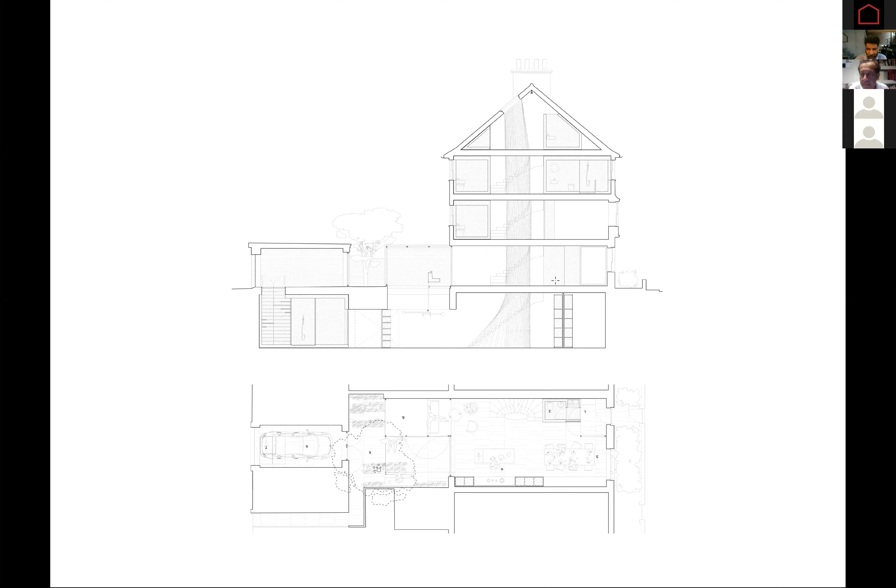So it's a house really that's mostly about internal modification, lots of cabinetry and some stonework. The stonework started as a reintroduction of some of the fine stone found in that house, namely travertine, and what we could do with that.

As you can see here, it's partly internal, partly external paving and floor finish, bringing that variety of finish internally.

Creating a staircase that would rise through the new basement and new roof extension, working with both stonemason and engineer, who reintroduced the idea of these reciprocal, part-cantilevered, part-reciprocal staircases.

Essentially, it's a medieval staircase technology that modern engineers and architects had lost, but was reintroduced more recently, specifically by Price and Myers in the late 80s.

So most of the house is a reintroduction of cabinetry. Some of this is by the same masons, who are obviously skilled. A lot of stonemasons are skilled in cabinetry or timber work as well as stone, because often the formwork for that stone would have to be done in timber.

Typical interior finishes, and there's our staircase. Now, the key thing here is that, apart from using some of that medieval technology, what we quickly realized as masons is that these staircases tend to have about 40% wastage.

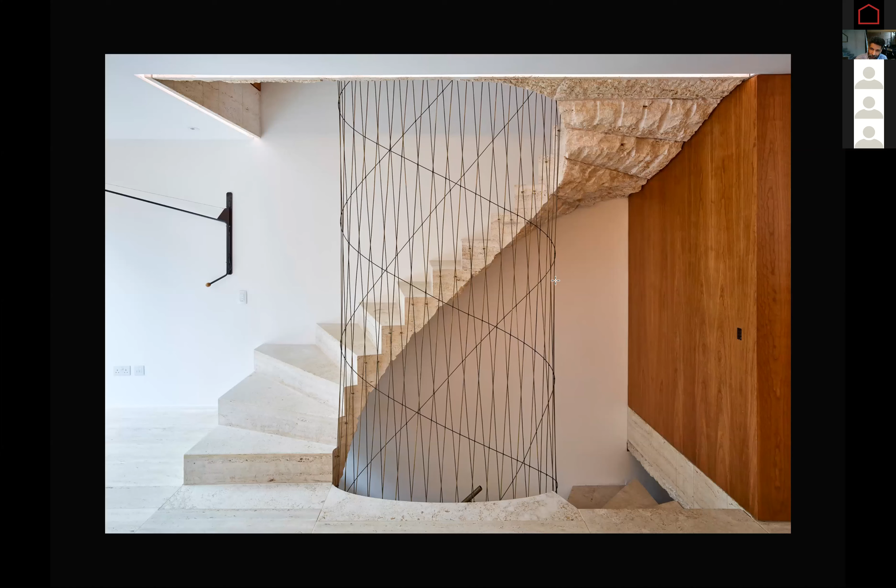So what we worked out with that mason was to take a block and cut or split the underside at a curve, not a straight line but a double curve. That would then unfold that block and allow you to get two treads instead of one out of the same block, saving material.

Looking at how we split that block, we realized, why not retain the finish of that? Given that we're thematically coming out of the basement, the subterranean area, and working our way up, refining the underside as we go, why don't we just leave that rough quarry, crude stonemason's finish as the finish, to emphasize that theme?

It's a view looking down at the new subterranean basement area of the house. This shows how we split those blocks and how they might fit together in the yard before they were assembled on site, and here's our stonemason assembling that from the basement upwards.

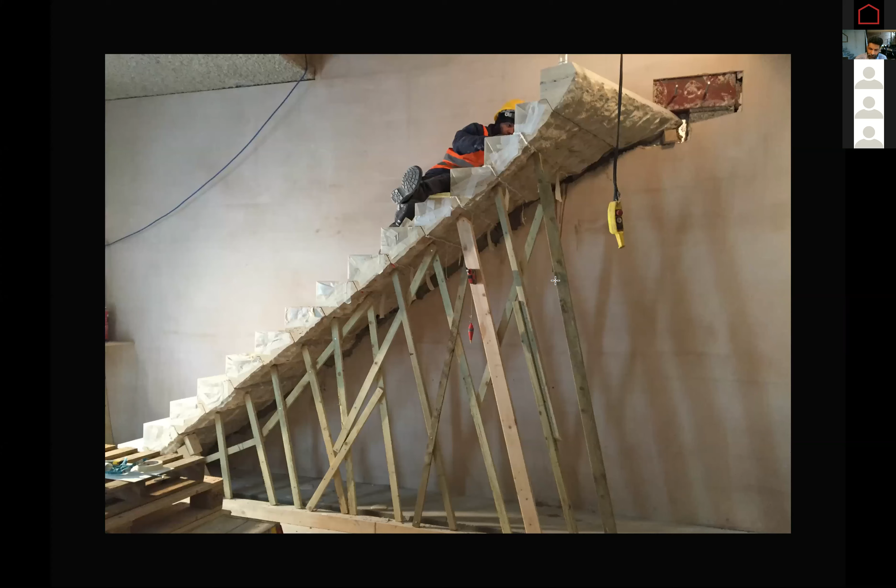One of the things we saw while in the mason's yard investigating how we might put this together is this very large limestone block, a subdivision of the master block that's been done with drill splitting.

Looking into the stone staircase introduced us to something most of us aren't educated in, which is stereotomy, the pattern-making of cutting stone and other materials. That was effectively the method for medieval stonemasons all the way to, I guess, the late 19th century, before concrete and steel became prevalent.

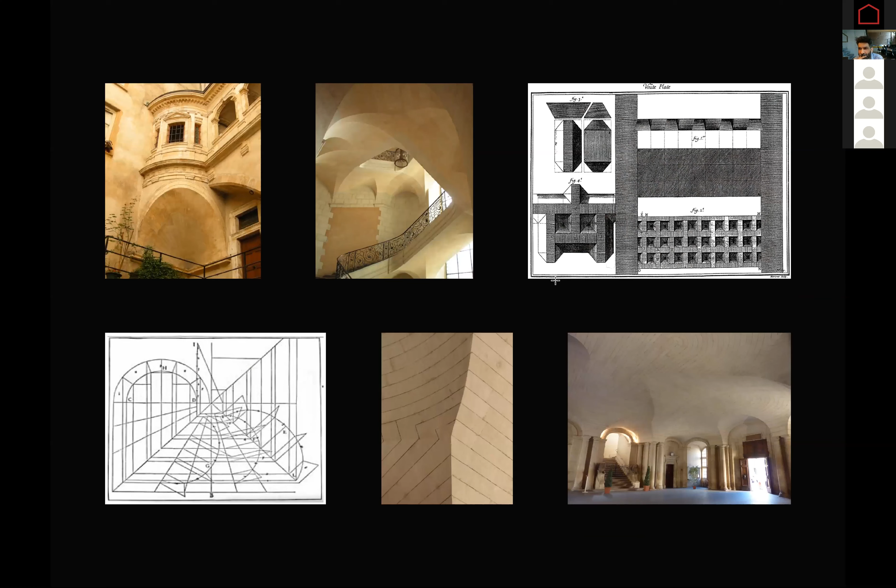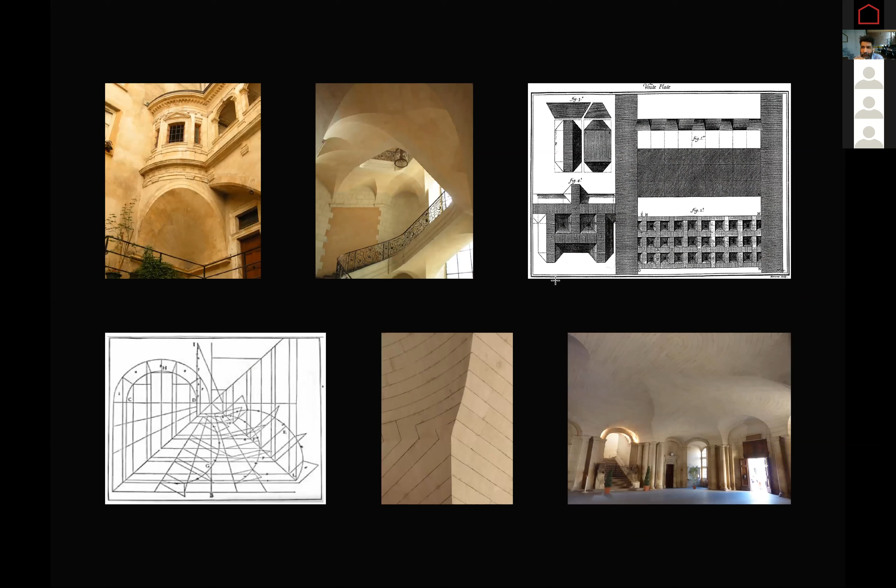This is an example of a staircase in Graz, a double interlocking spiral, helical stair. But what we found fascinating was, some of you might know Abeille, a 17th century French engineer—that top right-hand image is a drawing of his, suggesting that if you can't span a space in a single piece of stone, you could cut out smaller pieces and make them reciprocally rest on one another and span in a flat arch.

An example of that is directly below, where it's not interlocking in that grid manner, but it's still interlocking to effectively give you a flat stone soffit that then takes the loading down in those sort of scalloped arches. And I guess some other examples there, earlier ones of squinches and other forms of geometry that then take that load down. This is all very fascinating to us.

We weren't sure how relevant it could be. It's very easy to obviously introduce that into, what can I say, high-end luxury dwellings. Is it applicable anywhere else is the question.

Naturally, in the introduction, we were talking about how stone tends to be used today, which is this method, effectively stone cladding. So you can see there in the drawing on the right-hand side, your superstructure might be concrete, it might be steel framed. You would then clamp into that. You'd have to clamp through insulation, vapor barriers, waterproofing, and all the rest of it, until you get to then a set of rails onto which the stone is fixed, and the stone itself would be somehow bonded to another set of rails or other system. Quite a lot of energy, effort and cost in doing that.

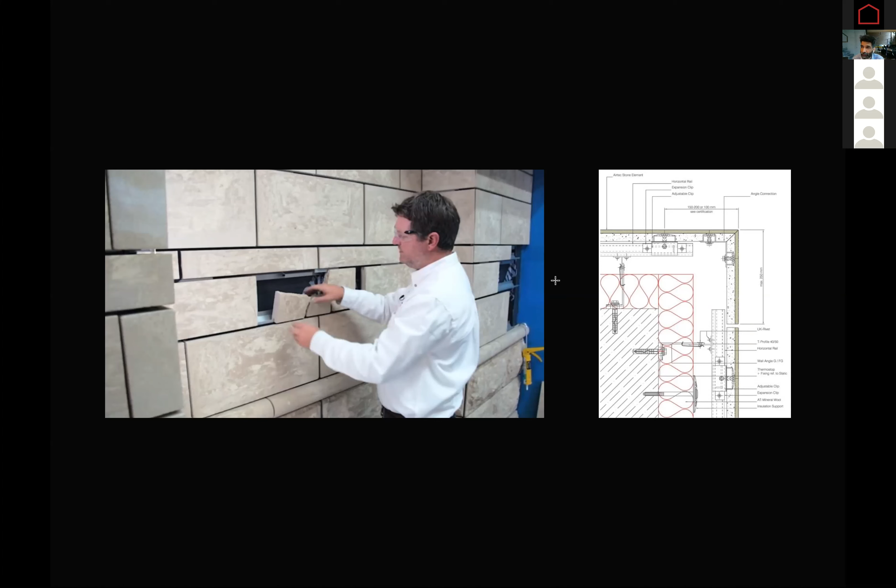So this is the result really from that system over the last 100 years. For us, the question then of whether you can build in stone as superstructure, and economically compared to, say, the luxury of that staircase, investigating it for a well-off client, as it were, arrived with Clerkenwell Close.

Now, Clerkenwell Close sits outside what was the old medieval city of London, on a site which was a Norman nunnery. So there was nothing on the site until the Norman invasion, and the Normans built this Augustinian nunnery. And they introduced the idea of using stone, cut stone, limestone, that's fresh out the quarry, so relatively soft to carve, and interlocking the stones.

So after 6 months, a year, they calcify and become incredibly strong, compared to, say, rubble wall construction, so rubble walled fortifications. Now, obviously, once they gain power and stability in any area, that same method, technology is used for other buildings of status, specifically here religious ones.

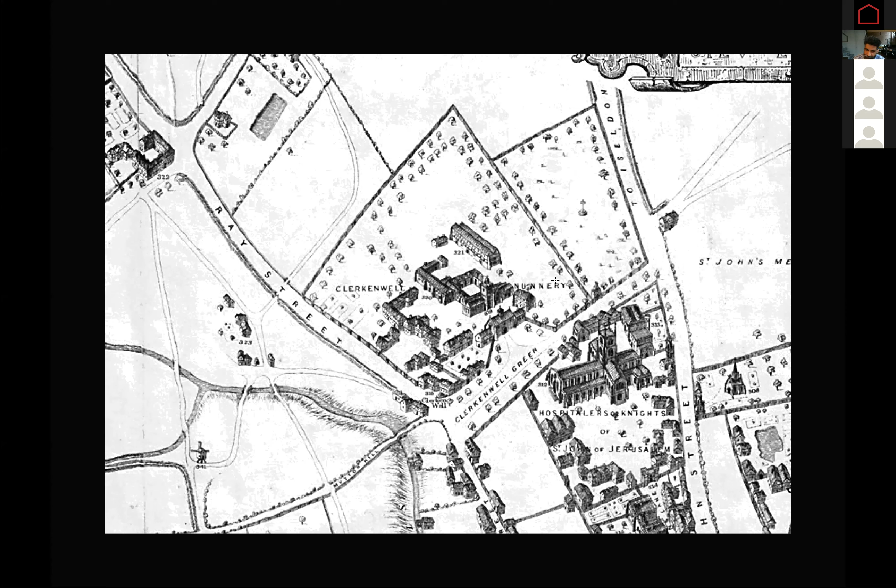And today, any Labour Party marches normally start on the 1st of May from that site. So it's an area that's, because it's been outside the city walls, was slightly freer in terms of its laws for radicalism, printing presses, revolutionary ideas, if you like, all the way until after the war, when certain boroughs of London, including this one, lost about 50% of their population, and things became a little bit more conservative in outlook.

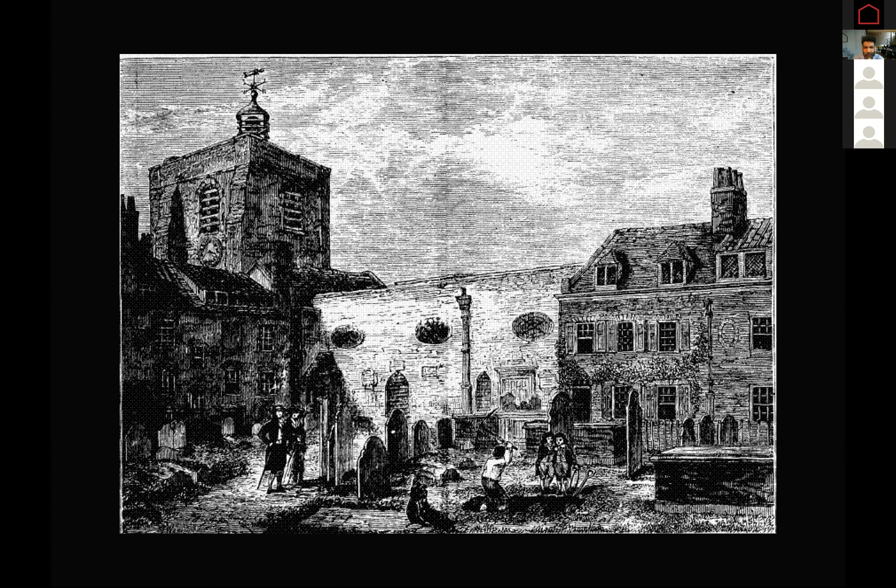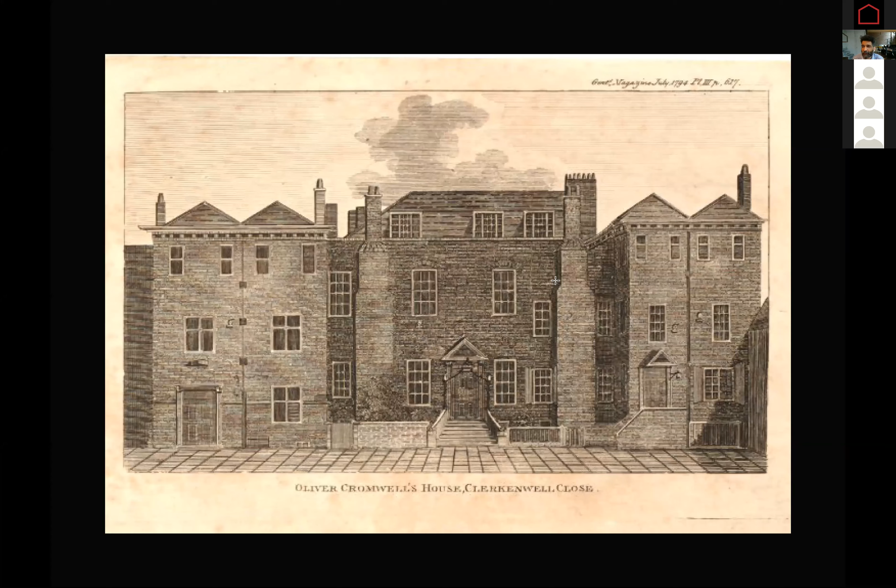This is what was left before the Victorians demolished. This is Oliver Cromwell's house before it was demolished on the close, effectively our neighbour on the site. And then the typical buildings that were on the site, if they weren't the abbey proper. So if it wasn't the nuns' accommodation, but the servants to the nuns and the stables, it would have been this sort of structure, timber structure.

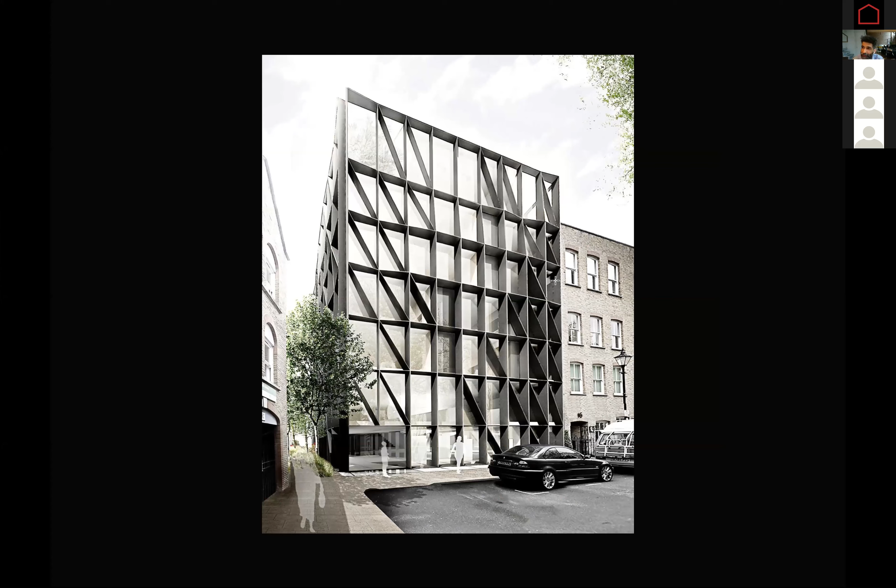Our initial designer response, as well as taking on board various environmental criteria and all the other aspects that all of us typically as architects use, was to suggest using an engineer's piece of software, a self-learning algorithm. For glazing on an office or residential building, typically those glazing units come with some sort of aluminium or mild steel substructure that's bonded, clipped or fixed, like a curtain wall, to the floor slab, with the superstructure behind.

It occurred to us, so supposing you take that typical unit system and strip it of all its metal, leaving just a double glazed unit. Then you take that metal, as if you've melted it down, and give it to the algorithm and say: we have this unit system of glazing, and we want to reapply that metal, or less of it, as superstructure.

The algorithm effectively gave us a grid of metal that we put fireproofing on, and then a hot bronze applied finish as a self-weathering system. It gave us a grid with some diagonals, because the load path on the building had to stop it twisting, and generated areas that require less metal and some that require more—quite an interesting modulation, in some respects alluding to the idea of those medieval timber structures.

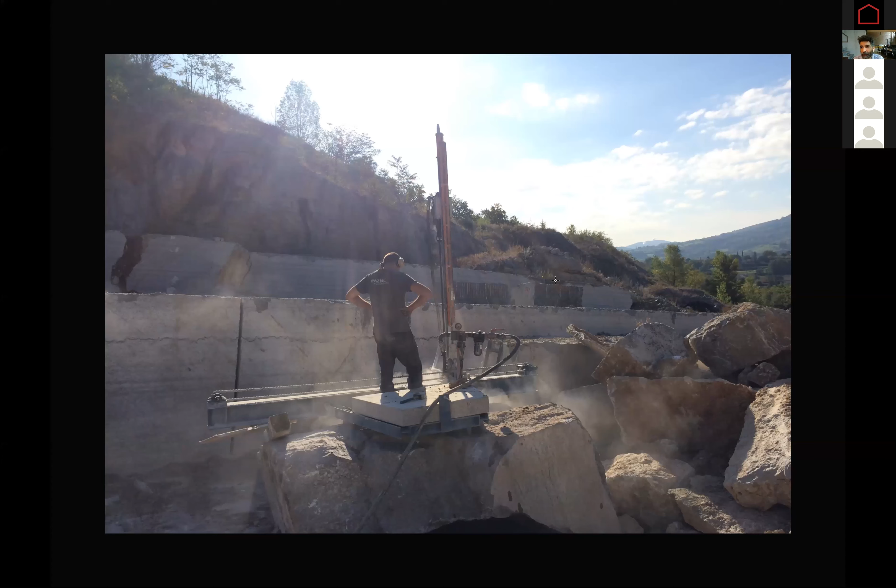Once we calculated the volume of stone together, we gave that to the stonemasons, and they said, look, we can supply and install the stone for this much money. That, as it turned out, was about 25% of the cost of building a steel frame or a concrete frame and then cladding it. Now you have to remember, cladding an engaged facade means insulating and waterproofing it, fireproofing it, and all the rest of it.

So the stone itself is superstructure, but effectively does all that at the same time. That's sometimes difficult for quantity surveyors to understand, because they still look at it as if it's only the frame itself, and surely after that cladding still has to be applied. It takes some time to run through an entire cost plan with a quantity surveyor and demonstrate that the cost of the stone is superstructure plus cladding plus waterproofing, weatherproofing, insulation—all the rest of it—because that's what it's doing. It's performing all those functions.

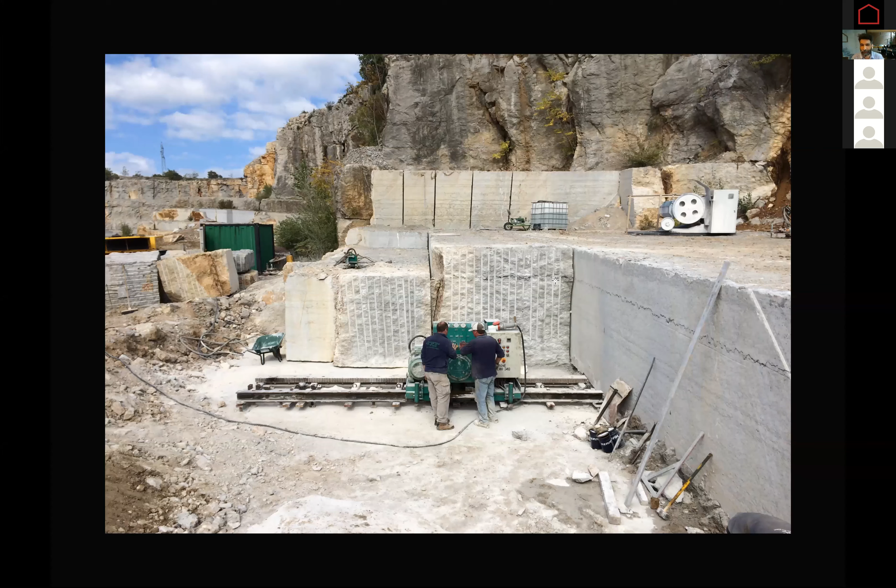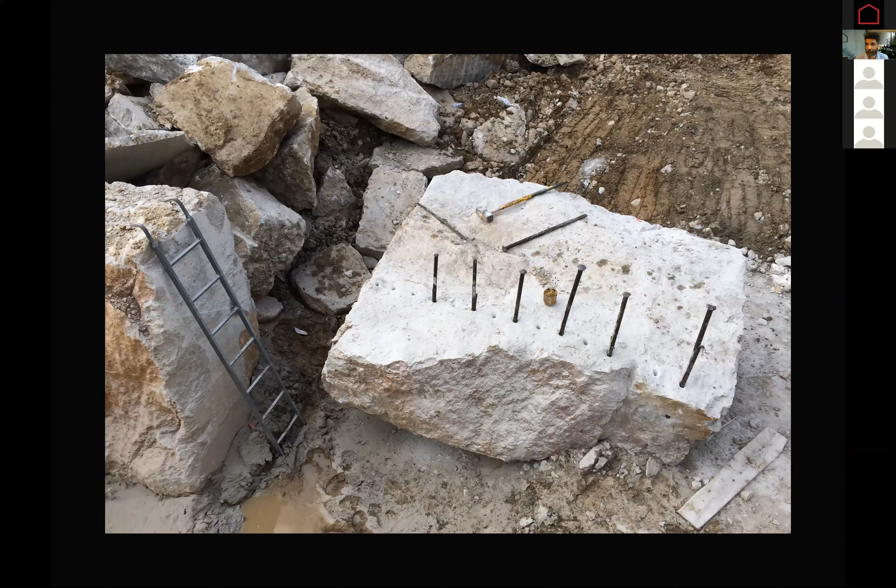Part of the reason it's inexpensive, especially today, is because if you look carefully at the cutting method, it doesn't take a great deal of labor anymore to cut the stone and extract it from a quarry. What we discovered is there were 3 types of finishes that come out of the quarry, and even today they're reducing. From right to left: the saw cutting that extracts the master block, the middle sedimentary layer split open with a bit of pressure, and the one on the far left is the drilling. Occasionally you'll find fossils, ammonite shells, and a quartz pocket every now and then too.

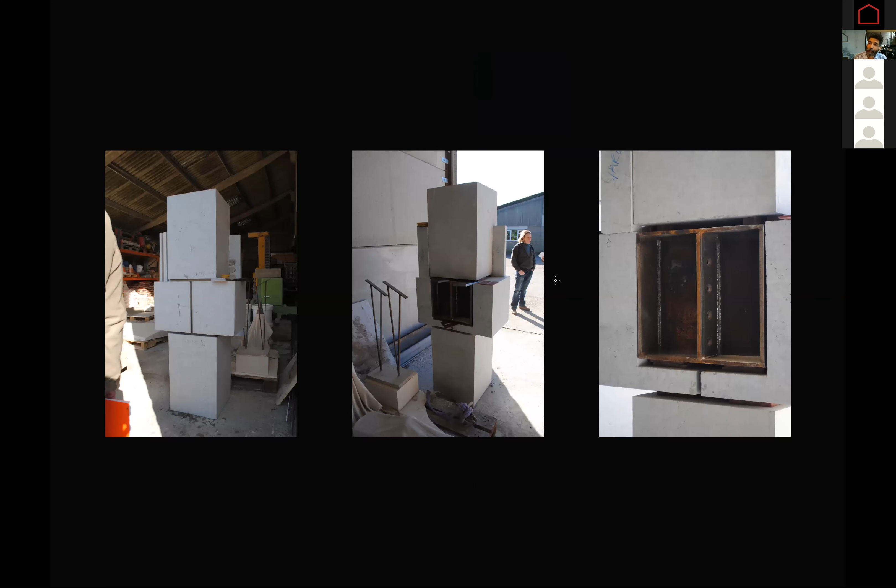The next step was to bring those stones together and figure out how to hold up the slab. We tested this in the yard with a metal box that's just grouted. Gravity essentially sits on top of the metal box, which is connected back to the floor slab. Our test said it was all going to work out fine.

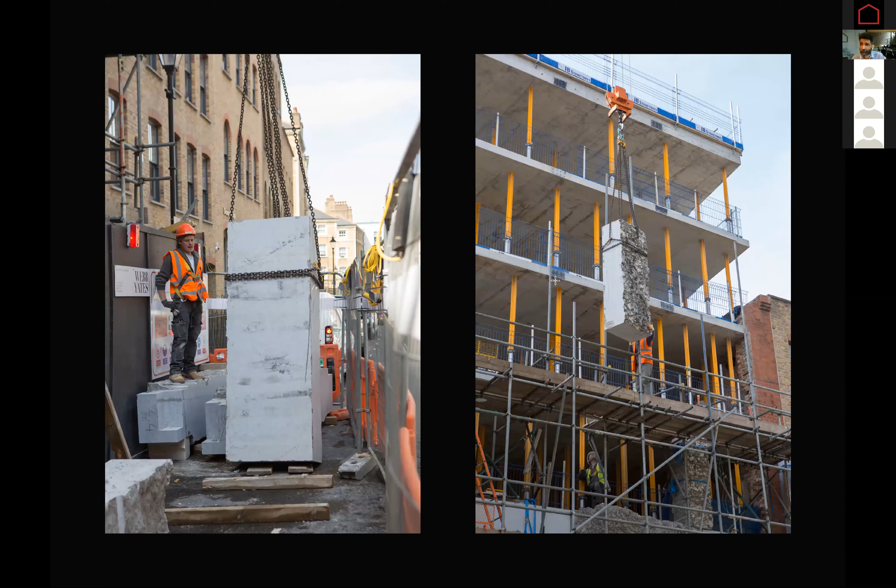So on we went, and that's under construction. Floor slabs cast in, all on temporary props. If you look carefully, you can see those black squares on the edge of the slab - that's the metal bosses, the receivers for the metal bosses cast into place, ready to receive the columns and beams.

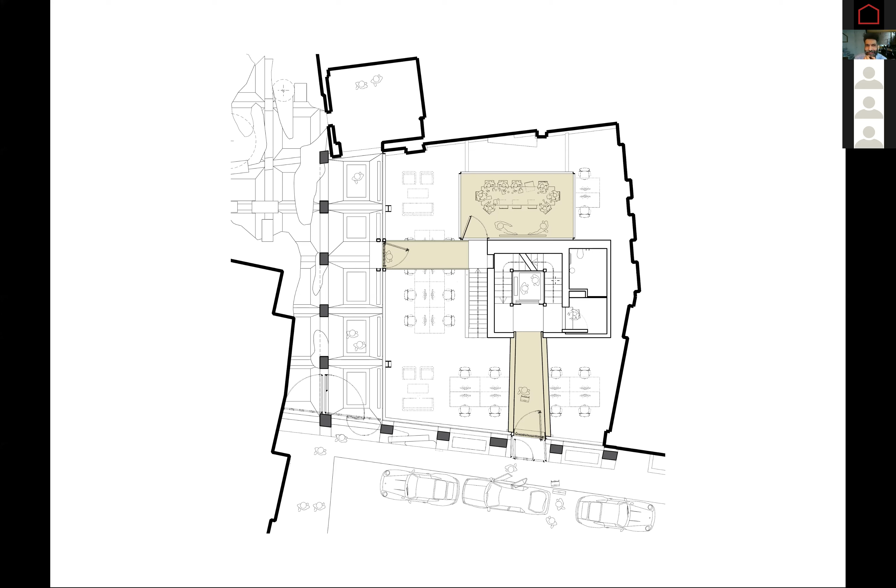Here's our floor plan, ground floor plan - you can see the perimeter of the exoskeleton. The advantage of an exoskeleton is that there are no internal columns. So the exoskeleton spans from the edge by about 8-9 meters to the central core that stops the building twisting.

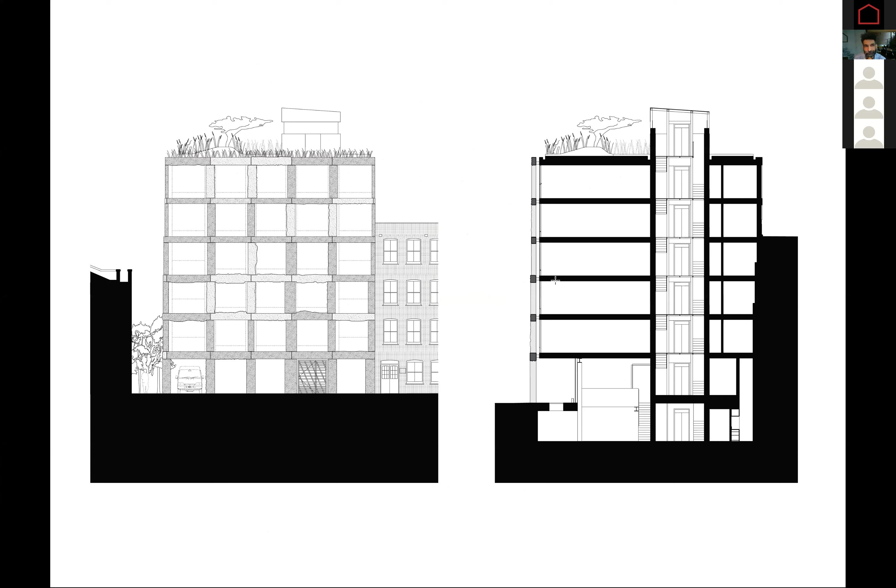And then the final elevation showing the 3 types of finish: saw cut, sedimentary split, and drilled split. Here's your construction detail, for those of you interested in the technicality of it.

It's reasonably straightforward. The reason for making an exoskeleton is principally because it makes the junctions of all window areas quite easy. You've got a curtain wall that runs down the entire facade and deals with weathering, rainfall and the rest of it. You don't have to be precise about every window frame, and you don't have to do any more work to your stone either.

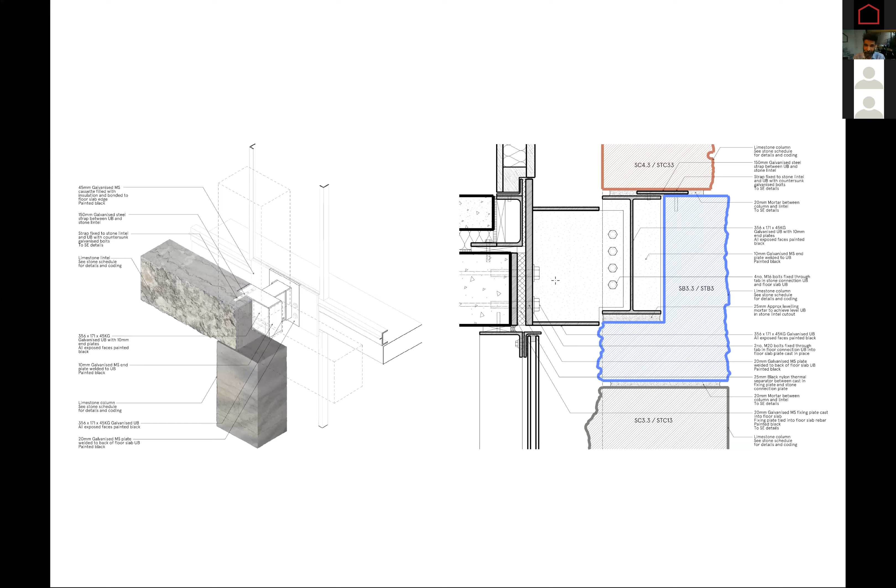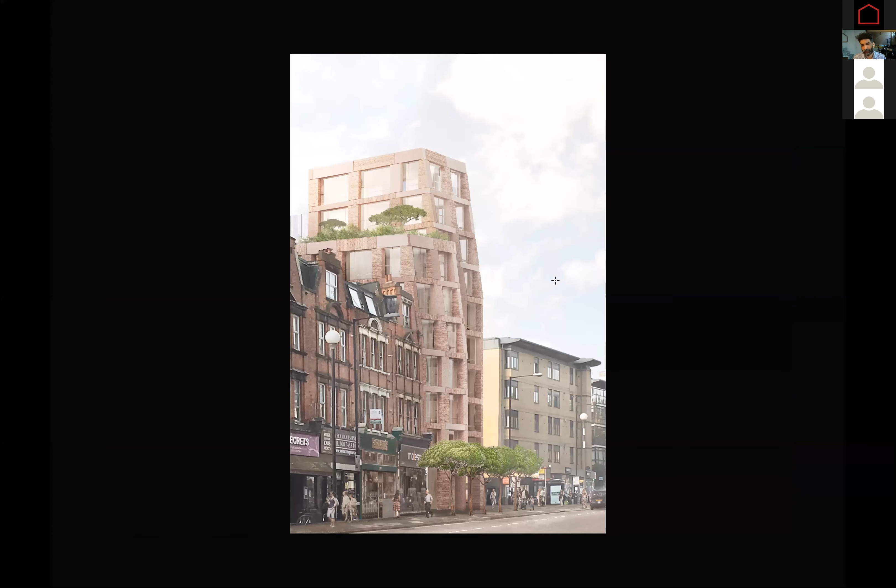After that building, we were asked by Camden's planning department to help a developer on a site in a similar vein, as it were. So we actually doubled the height of the building there. Now, the key issue about doubling the height of a building, especially in the UK, is that you then cross a threshold for fire.

Limestone will survive a fire if you make the columns and beams big enough. What we did was send limestone as well as basalt and other stones to the Building Research Establishment for fire testing. If you bear with me, we'll just close the door on some work that's going on upstairs. Thanks.

And what we found at the Building Research Establishment was that we tested not just the types of stone, we actually tested their position. So if you engage a stone column and beam with the elevation, what that means is that part of the internal elevation is insulated effectively, because you're bringing your insulation internally, then lining it, whether it's plasterboard or something else.

And in that condition, what's happening in the event of a fire is one side of the column and beam is actually protected from the fire, while the other three sides, external ones, if the fire is then penetrating a window, are being heated up, and that creates differential expansion and is likely to crack the stone, stress it, and cut the...

And with that differential expansion, it means you either can't use the stone, or you have to increase the mass of it, and therefore the cost of it. And therefore, we found basalt and an external skeleton is ideal for then meeting that fire criteria, structural and fire criteria.

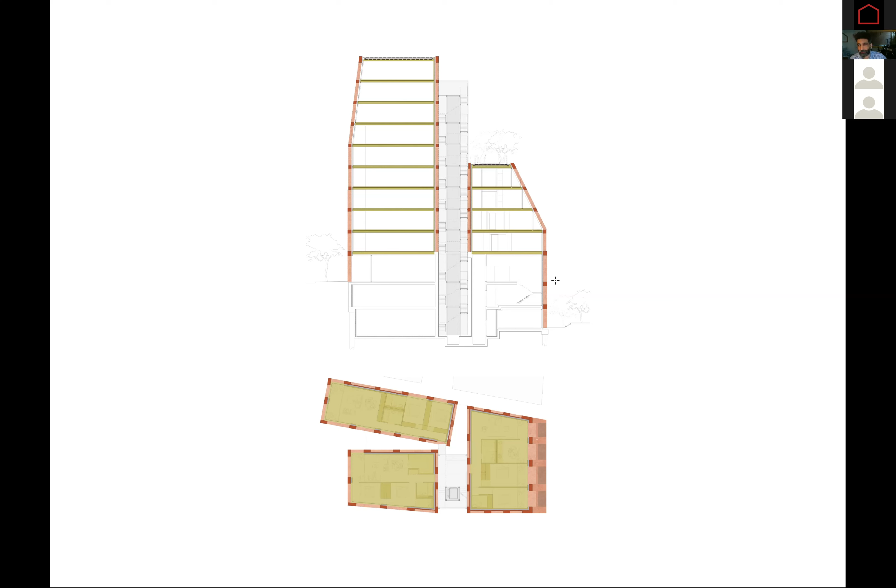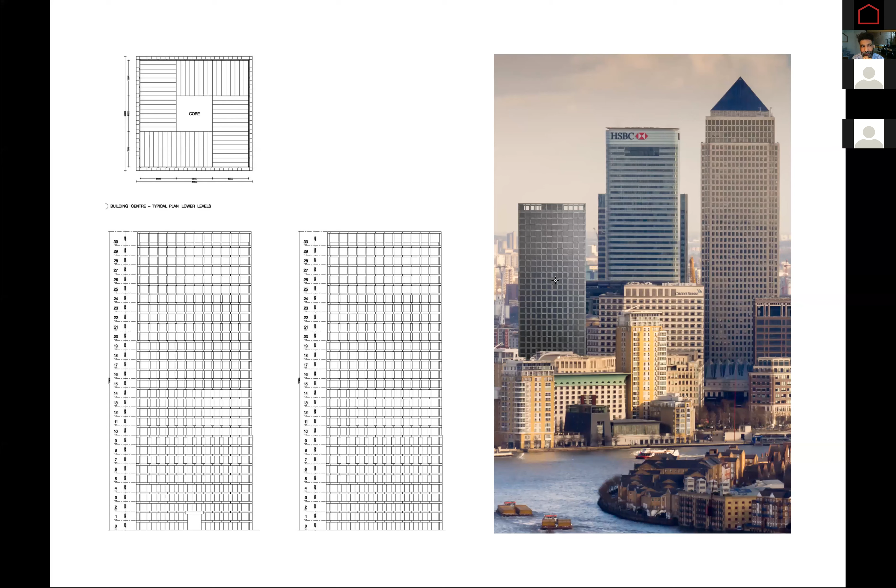And the purpose of that wasn't just to demonstrate you could, but actually, is it cheaper? Is it environmentally better? There it's its height. If you look at that top left-hand side, that's the plan, very simple, core in the center. We actually worked with people at Canary Wharf to get a brief for its ideal dimensions, floor dimensions, floor areas per floor for letting purposes. And that gave us the overall dimensions of the building. They also suggested that maybe 30 stories is ideal for them as a sort of peripheral development from the core of Canary Wharf.

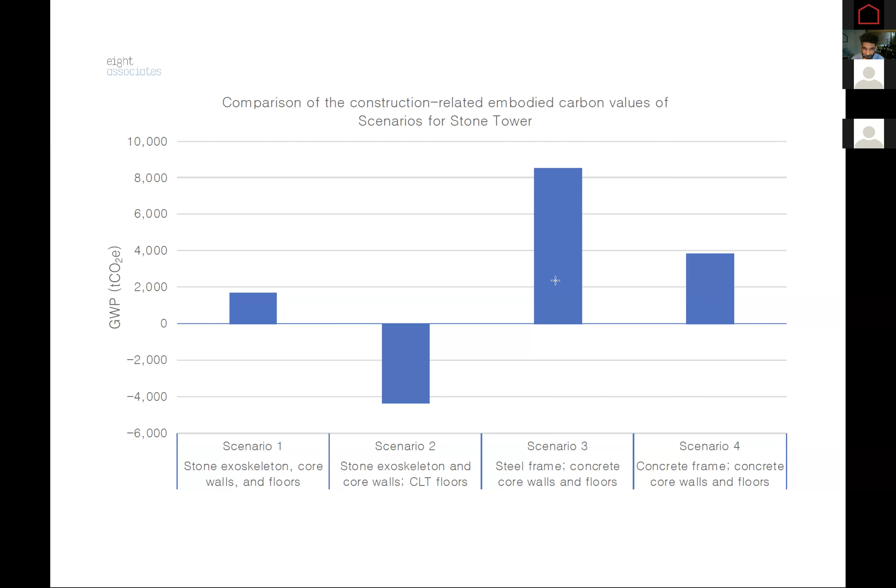So the purpose of this exercise was to demonstrate to large-scale developers, offices and residential, that building in structural stone is cheaper and obviously far more sustainable. If you're combining stone and timber, then it's carbon negative to the extent that it would actually be better to go around demolishing city centers made up of these steel and concrete buildings, rebuild in stone and timber, and you'd still come out carbon negative.

Okay, now with the exhibition, we were asked to invite some architects, other practitioners. Some of you might already know Gilles Perraudin. He's based in the south of France, actually in Lyon, though a lot of his work is in the south of France.

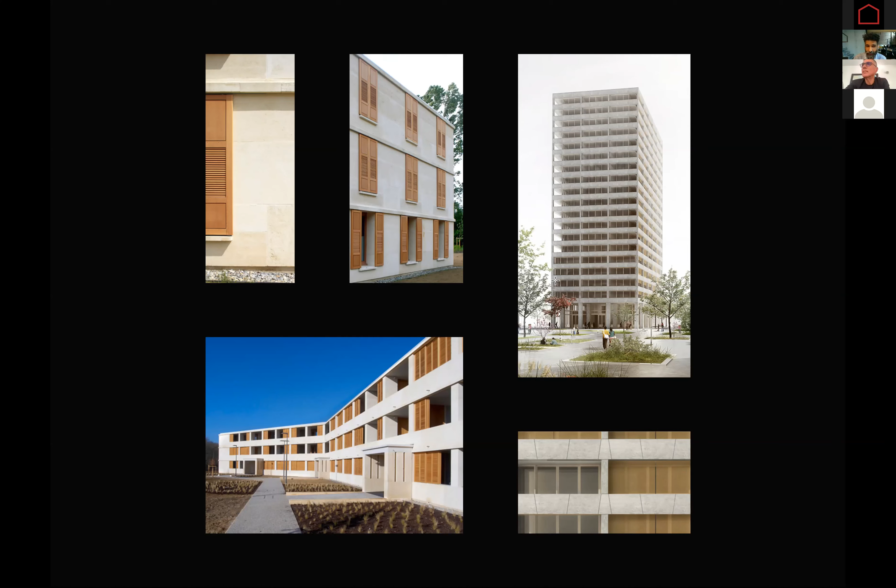I mentioned earlier that in France this was called austerity construction after the war. Perraudin is actually a tradition that carries on from Pouillon. After the war, Pouillon took on the challenge of reconstruction, starting in Marseille and challenging the burghers of Marseille with the idea that he could build faster and cheaper in stone than people were proposing in steel and concrete.

The thing is, after the war, in Europe especially, steel and concrete is obviously emblematic of the modern era. We're leaving two world wars behind us, the traditions of the past, and moving forward with the new age - steel and concrete is going to be our signature, politically as well as for the profession.

Pouillon had worked for Auguste Perret, as had Corbusier. So while Corbusier is building the Unité in Marseille, Pouillon is building on the harbour side and in town. Especially at that time with in-situ concrete, Corb was building probably 5, sometimes 10 times the cost of what Pouillon was building in this load-bearing stone, lots of it low-rise.

And in those sorts of proportions - analysing those blocks of stone, they look traditional, and that's partly because the size of stones you extract to be economical, and the way you put them together in terms of lintels and keystones, begins to dictate those proportions, and we tend to look at them as traditional.

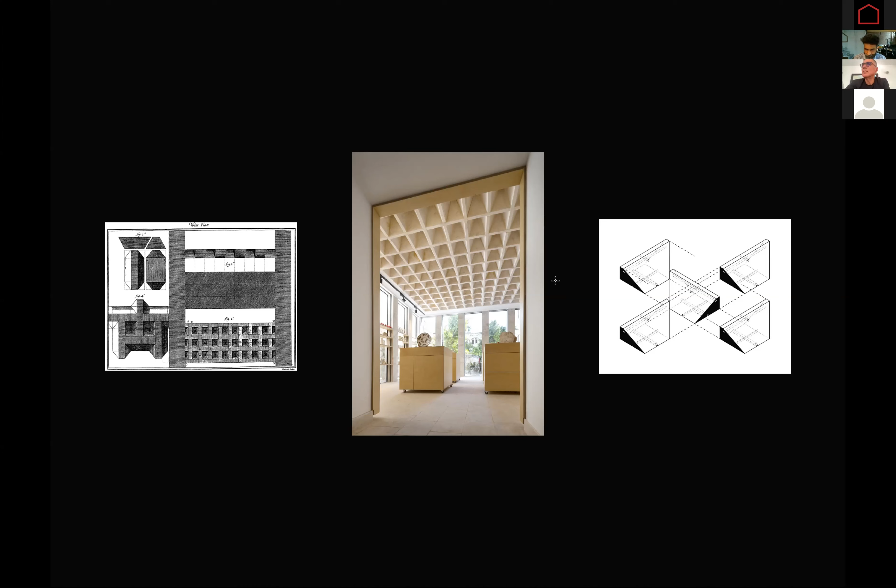This is another stonemason firm, called Italia Romeo, actually based in Trani, Italy, who created another reciprocal structure. But in this case they've taken a piece of software and turned it from a flat arch into a flat vault - you can see on the right-hand side the identical form of those individual stones.

And another Italian firm who are similarly using that sort of stereotomy, but using it with contemporary software and then robots to help cut out the stones.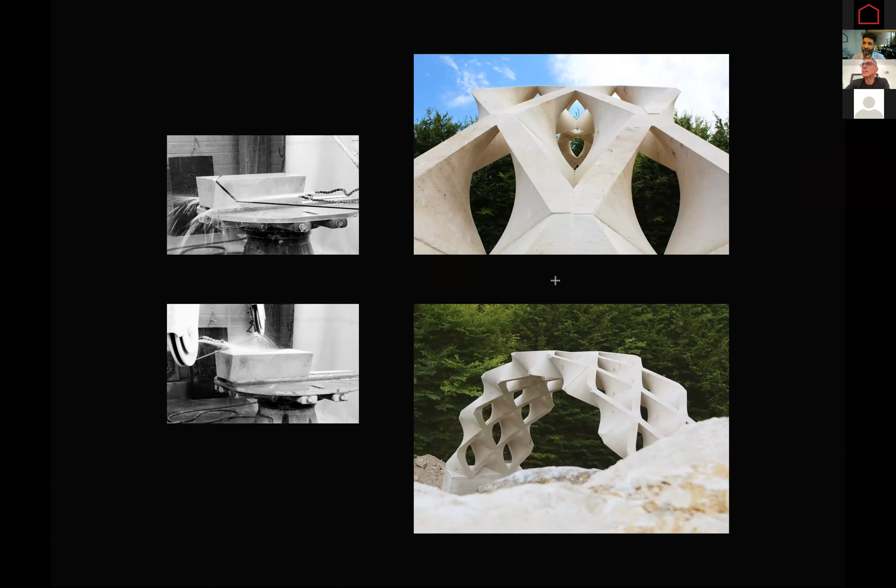You could argue in a fairly efficient way, but there are a lot of holes in it. Coming back to your question earlier on thin layers of stone - Italia Romeo actually innovated this product, which together we've called cross-laminated stone. It's taking waste stone, the stuff left over from cutting, and bonding it in layers. Initially their idea was to use it just as a facade material, a thin facade that you could clip on.

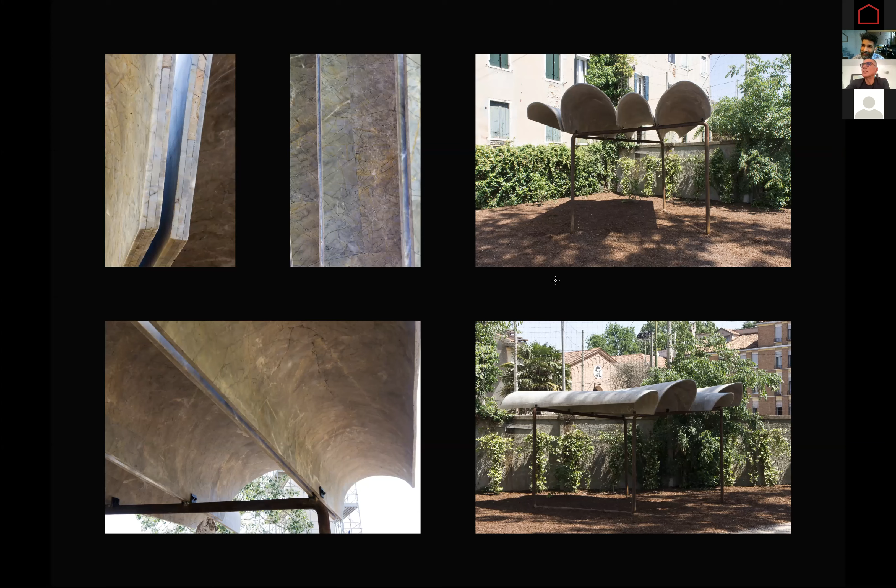We talked to them, and they wanted to exhibit this in Venice - I think this is how we met Gökhan. They gave us 4 weeks to come up with ideas to demonstrate its capabilities. We said, look, you're taking waste stone, which is all in crumbled pieces, and bonding it together. Instead of laying it flat, you could lay it over any formwork of any shape you like. And if that formwork determines a structural ability, in this case a vault, why not demonstrate it's not just useful for cladding, but actually has its own structural ability.

So this is a series of conical arches that demonstrated those abilities in Venice. That concludes the talk on stone, and I'll leave you to ask any questions.

Okay, thank you. I mean, the trajectory there, from Abeille to this, is a very interesting trajectory. There's a lot of similarities over 600, 700 years, architects trying to figure out how to piece together these geometries and the materiality into structure and architecture.

My question to you is about this effort at proving a certain sustainability, a certain economy from the stone. You mentioned earlier the carbon footprint. In your example, you went from London to France. How much does this issue of the quarry versus the project, these distances, factor into the cost analysis of stone? Because architects like Perraudin that you mentioned use stone that's somewhat close by. Can you speak a little bit about the logistics, the cost?